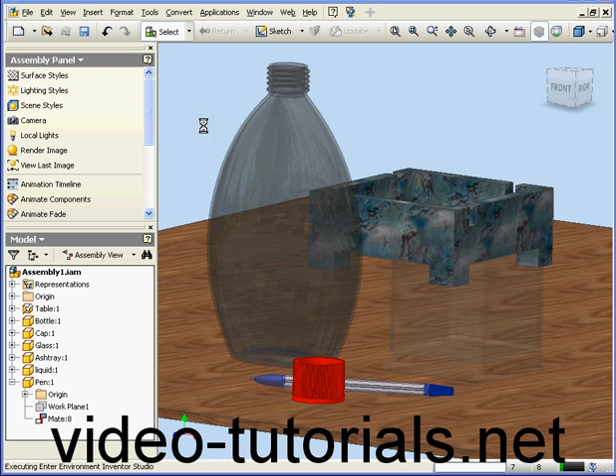First, let's go to the Inventor Studio environment, Applications, Inventor Studio. Now let's click on Render Image. The Render Image dialog window opens.

First, we can specify the output size on the General tab. We can also choose an option and size from this drop-down menu. Next, we can choose between the current view or the views provided by each of our cameras.

We can also choose a lighting style from this drop-down menu. Table Top is pre-selected here since we'd set up this style in our previous tutorial.

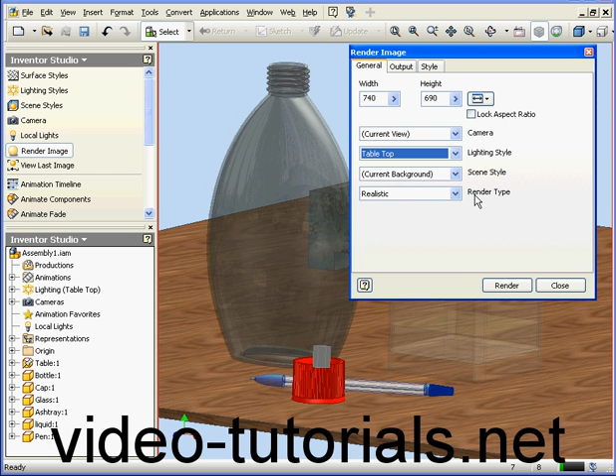Next option is Scene Style. Currently we don't have any selected. Render Type, we can choose between Realistic and Illustration.

Now let's take a look at the Output tab. Check here to save the rendered image to a file. A Save dialog window opens. Or we can also choose to render it to a temporary location.

Anti-aliasing, we can choose between None, Low, High, and Highest Anti-aliasing. The higher the anti-alias level, the slower the rendering process will be.

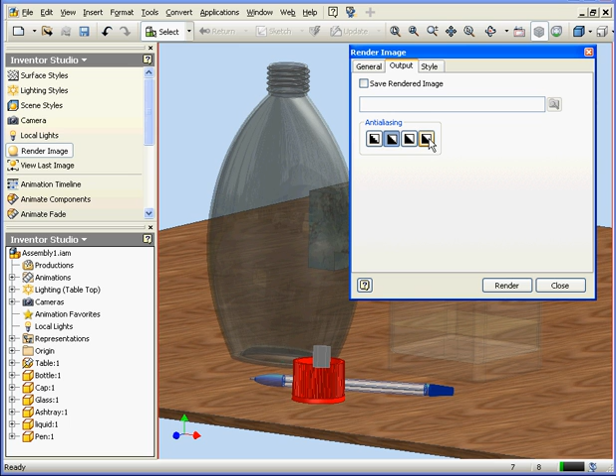Now let's check out the Style tab. Currently, there's only one option available on this tab, True Reflection. If this box is checked, the rendering process will be slower.

Let's go back to the General tab. If we select Illustration instead of Realistic from the Render Type drop-down menu, the Style tab is going to have more available options.

Now we're ready to render. Let's click Render. Inventor processes our request.

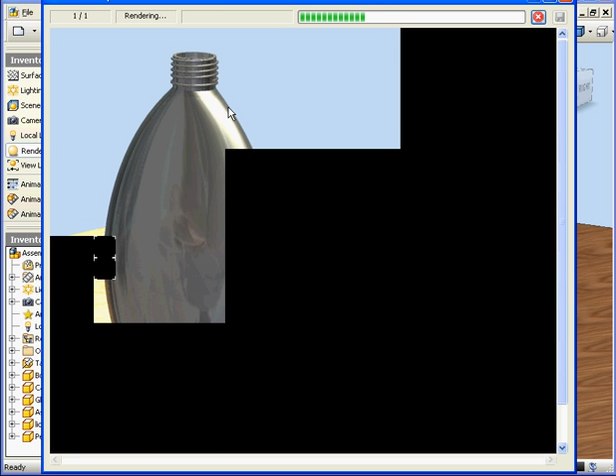It looks like the light is too bright. The image is definitely washed out. You also see that the reflective surfaces don't reflect the other objects in the scene.

Let's make some modifications. We'll close that window. Now right-click on Lighting, Edit,

and let's adjust the brightness. We'll lower it down to 30, Save, and Done.

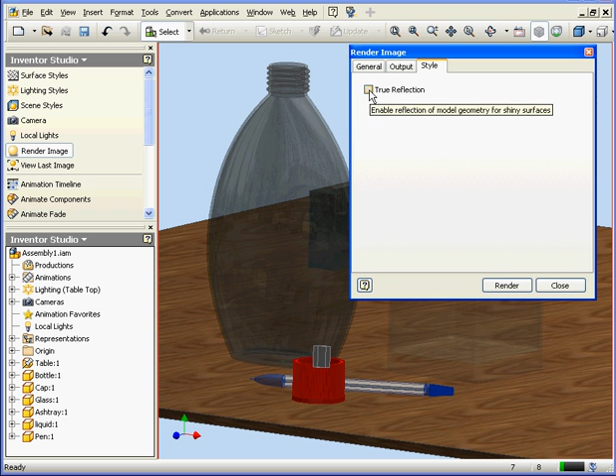Select Render Image. Let's go to the Style tab and check True Reflection. Back to the General tab, let's click Render.

Autodesk processes our request. Now the lighting style looks much better and we see some reflections.

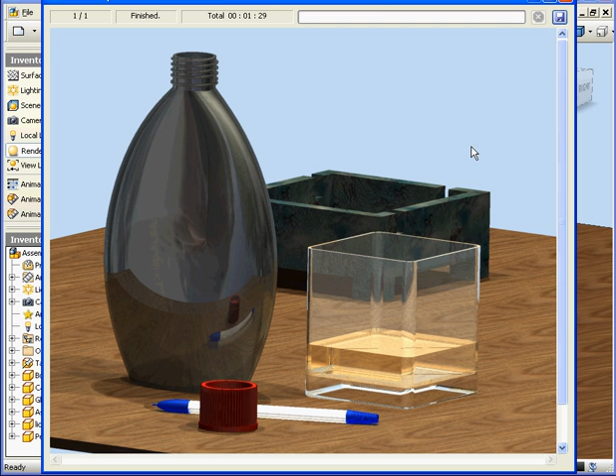If you're satisfied with the image, click Save. For now, we're going to cancel out of this option and close the rendered image window.

Now let's go check out Illustration rendering type. We go to the Style tab. Let's increase the levels to 10 with this slider. Let's check Show Shiny Highlights.

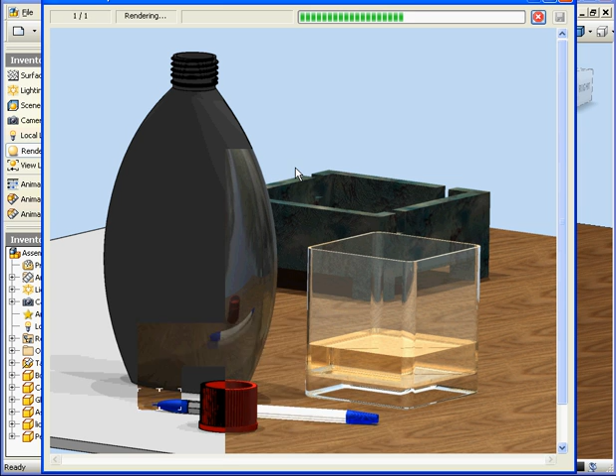And let's render. Inventor processes our request. It's significantly faster this way and thus less load for your CPU. Let's close our rendered image.

Now let's go back to a realistic render type. We'll select Camera 1 for our view and click Render. The rendering takes a bit longer now.

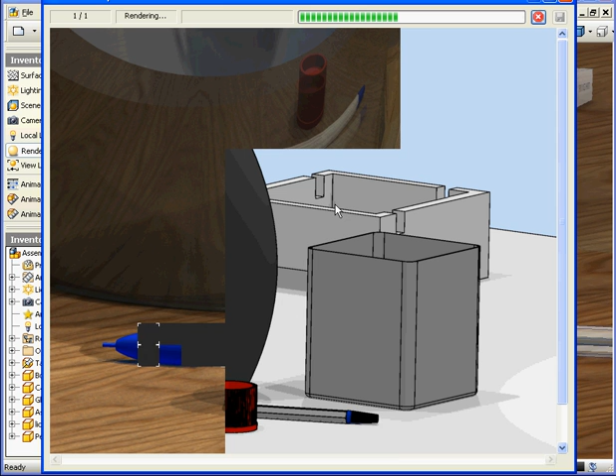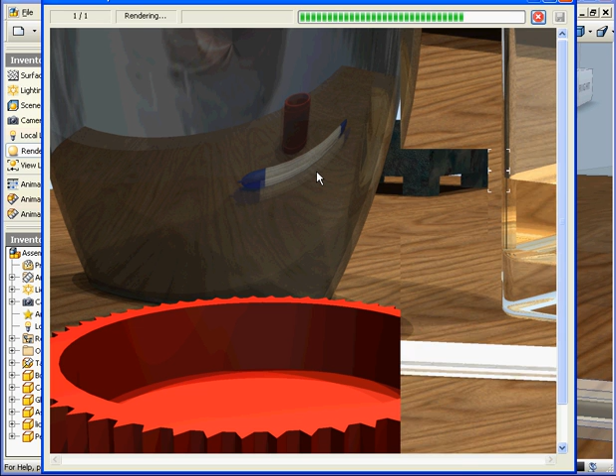The rendering is complete. Let's close this window and check out Camera 2's view. Click Render. And here is our rendered image from the perspective of Camera 2.

Let's close the image window, and let's zoom out a little bit. Now right-click on Camera 1, Edit. I want to adjust Camera 1 a little bit.

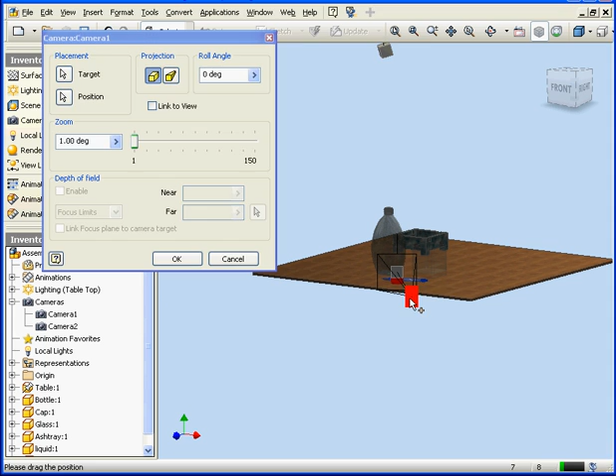We can adjust it up and across the various axes, or we can simply freely drag it. Click OK when you're done, and let's check Link to View to see our changes.

And this concludes our tutorial about rendering images.